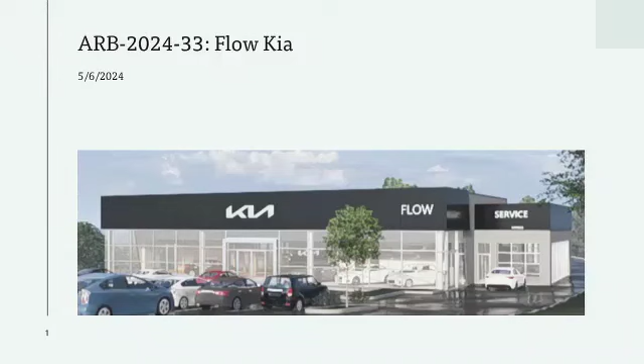Okay, today we are reviewing the proposed renovation for the Flow Kia building at Pantops. This is your second review of the architectural design, and it's a first review of the corresponding site changes. The site is located on the north side of Route 250 East, a short distance east of Town and Country Lane.

The existing building, as you probably remember, was constructed as a restaurant. It was associated with the Town and Country Motor Lodge, which was originally located just to the west. Those buildings were part of a group of buildings in the area of Route 250, built in the mid-50s in popular roadside architectural styles.

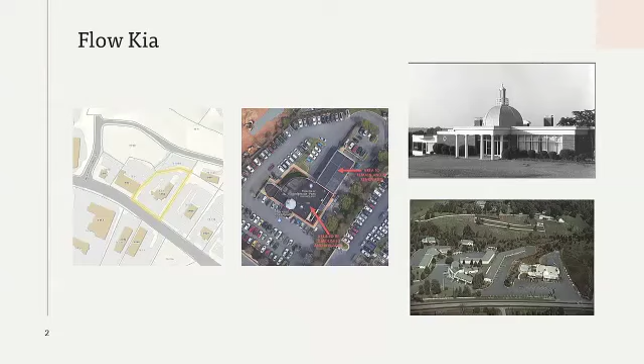In this proposal, the front portion of the building would be demolished and replaced with a new showroom building. The rear service portion of the building would be retained and renovated.

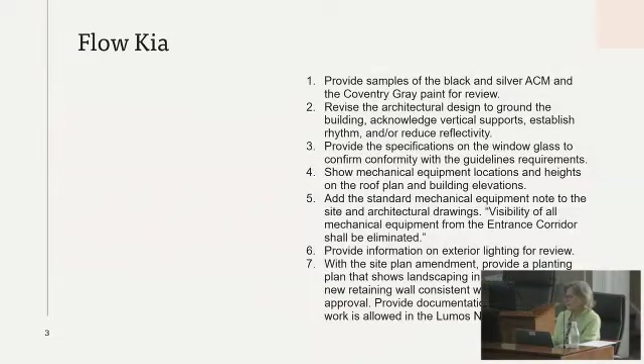You completed a review of the architectural design for this project on February 19th of this year. There were 7 comments resulting from that review that required revisions.

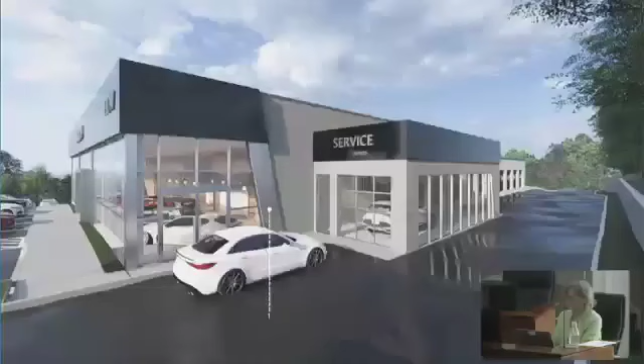The first comment was about providing physical samples of the materials to confirm primarily that reflectivity wasn't going to be excessive. Those samples were provided, and they're actually on the stage behind you if you want to look at them. The black panel there doesn't appear to be overly reflective, and the silver panel does, however, have a metallic finish. It's used for the angled elements in the building, the entrance surround, and columns on the front elevation. But given those locations and the amount that's proposed, we don't expect that metallic panel to have a negative impact on the street.

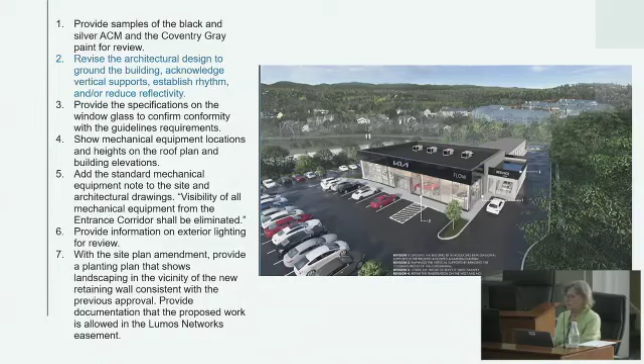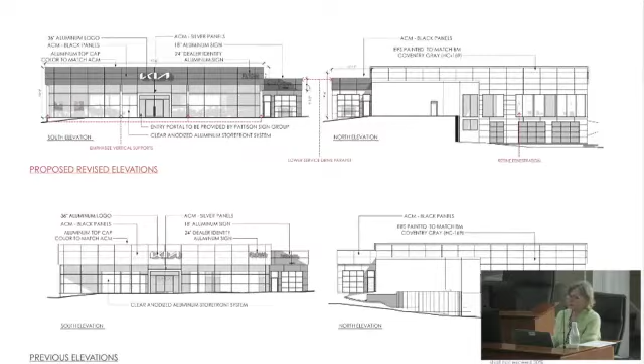The second comment from February was to ground the building and acknowledge the vertical supports. To do that, the angled elements were reorganized on both of the side elevations, and the front columns were moved to the outside of the curtain wall. We feel those changes do help ground the building and establish rhythm. The service bay was also reduced in height, and that helps with the scale and massing.

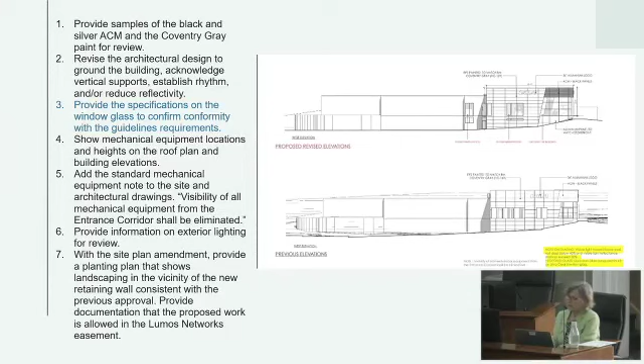The third comment asked for confirmation that the window glass conforms to the guidelines requirements. The note appears on the plan, and the manufacturer's website describes the glass as neutral in color.

There were 2 comments about mechanical equipment. A building section was included in the submittal that shows the equipment locations and heights level with the parapet. The equipment is also shown in the perspective images.

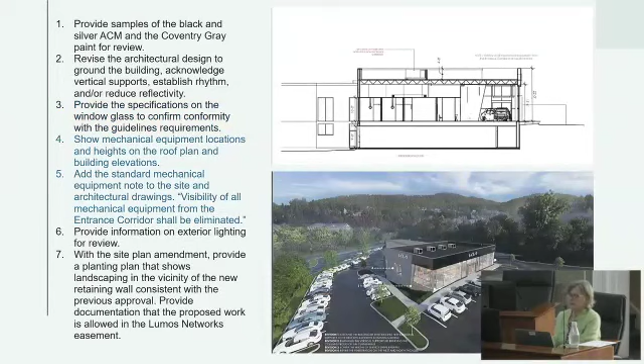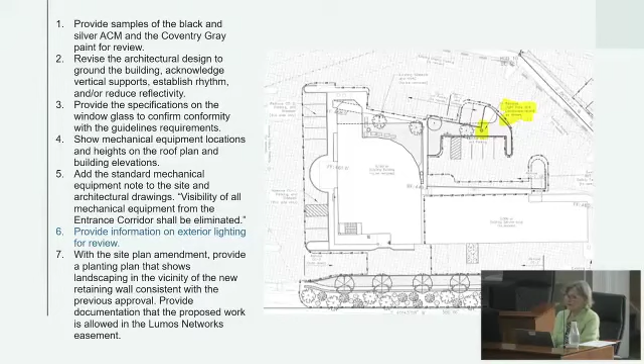Comments from February included a request for information on exterior lighting. There are no wall-mounted fixtures shown on the drawings, and the site plan shows 1 pole light to be removed. We've noted also that the current pole fixtures on site don't match what's on the previously approved site plan, so an updated photometric plan will be needed.

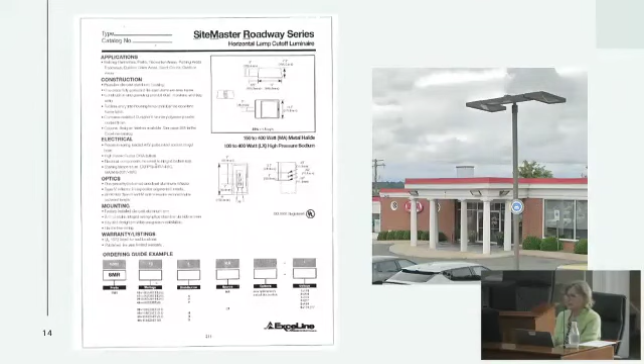Finally, in the previous review, we noted that a new retaining wall is proposed on the east side of the site. We noted that the site plan amendment would need to include a landscape plan addressing two issues: the existing landscaping that would be impacted by the new construction, and an easement in the area that would need some coordination.

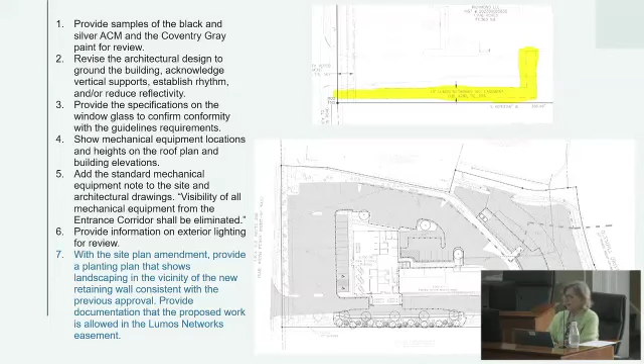A landscape plan was provided. It does include trees and shrubs along the retaining wall that are coordinated with the previously approved design. However, the easement was not addressed. That remains an outstanding issue.

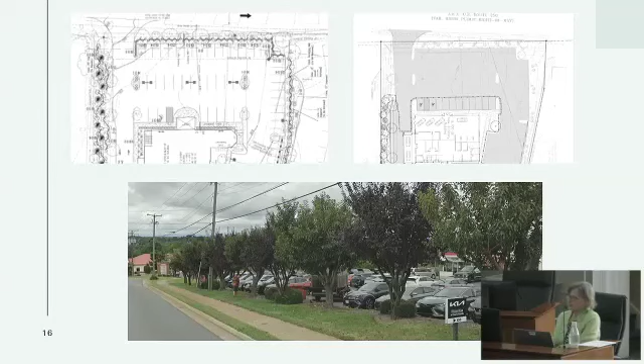The landscape plan shows significantly fewer shrubs at the parking lot perimeters than the previously approved plan, and it looks like some shrubs have been lost from the site over the years. So we've recommended that a consistent row of shrubs be shown on the plan, and we've added minor comments about tree species and notes on the plan as well. Our recommendation is for approval with the conditions listed in the staff report, and I'd be happy to answer any questions you have.

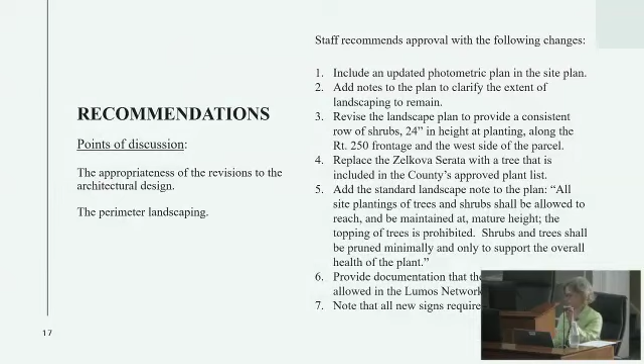All right, thanks a lot for that presentation. Tara, do you have any questions for staff? No, thank you for the presentation. Frank? No, I don't. Thank you, Margaret. I don't have any questions either, believe it or not.

So if the applicant has a presentation, now would be the time. Great, thank you.

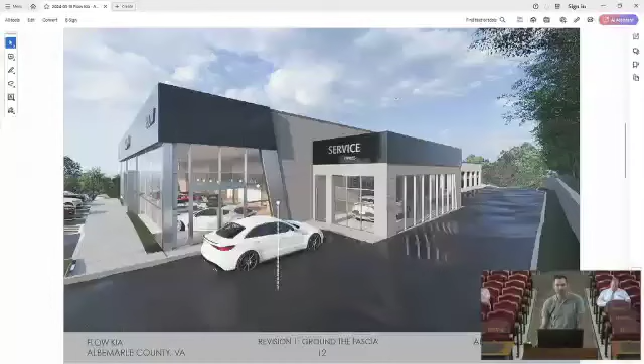My name is Kevin Schaefer. I'm with Design Develop. Thank you, Margaret, for that thorough presentation and the staff report and the guidance, that pretty much covered all the revisions to the architecture that I was going to run through. So I just wanted to let you know if there's any questions, we're here to answer them. I think Margaret did a great job going through the revisions, so I'm actually just going to turn it over to Justin at this point and let him talk through some of the site plan revisions and comments that have been ongoing.

Good afternoon, Justin Schimpf, the engineer for the project. I think most of our questions or comments are really clarifications we want from the staff. Some of the comments maybe not being included is a timing issue. We submitted this to the county earlier than before the ARB meeting you all had last time. So a few things didn't get addressed because they came up afterwards.

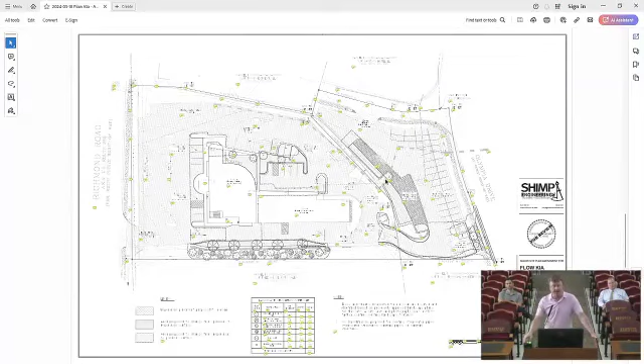Starting with a simple one, the Lumos easement just serves the building. It's fiber optic, but they no longer use that anymore, and we're having a hard time getting Lumos to respond. So it's not an easement for some other adjoining business, it's service to that building. That particular company requires an easement on your own property for their own hardware. So if that note could be revised to say 'if possible' or something, such that if we can never get anything, we're not worried about putting trees in there, because if we hit the line, it's only going to disturb our own service.

We'll of course have it marked and avoid it during construction, but that's what it is. So if we could get that clarified, just in case we can never get them to confirm anything about it. And then the other comments, I think, Margaret, if I understand correctly, is that the prior approved site plan essentially showed the standard rows of shrubs that have disappeared over time, and you all want to see those back per standard. So that's understandable, and I don't think we have any particular concern about those items.

The other change recommendation was to change the Zelkova to a different species, which makes sense. We are going to retain some in this picture right here. If you look, there'll be a couple Zelkovas in the very front here, and then a couple in the back that are part of this row, and then we'll replant with a different species in the middle. The retaining wall grading is taking out all of those trees in this area, and our proposal originally was to replant with the same species. We're just going to swap that one out since it's no longer on the county's approved list.

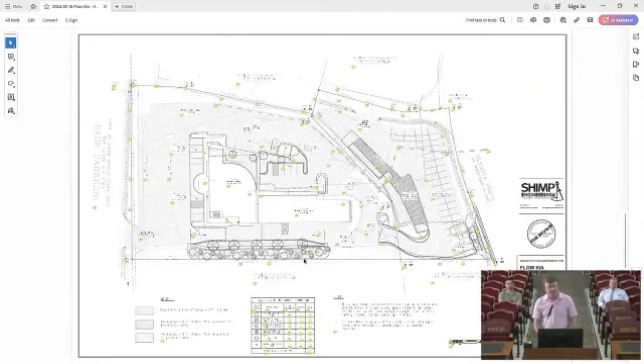So I think that's really the only concern we had about the recommendations. If we could just get a little leniency on the Lumos easement because of its unique circumstance, we should otherwise be able to address the comments. That's all I have.

All right, thanks a lot for that presentation. Frank, do you have any questions for the applicant? Sure. Justin, I guess the question for you: are the trees in the easement small trees? Are there any large canopy trees, or are they? The Lumos easement, yes, there are—I'd have to zoom in on this a bit.

So, proposed plants—we have the easement right here, this is one of the lines of it, then it goes to the edge of this retaining wall. So actually it looks like we just got hollies and service berries kind of back in the easement area, and the larger trees are actually in the front of it. Yeah, okay.

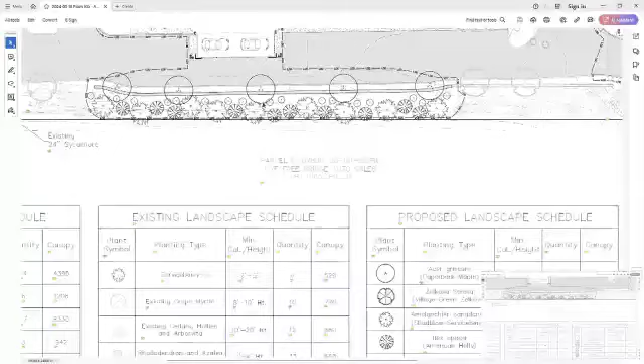Thank you. Okay, thanks. Tara, do you have any questions? No, thank you, Justin. All right, and I don't have any questions either. Thank you.

Are there any members of the public that would like to make a comment? I don't have anyone. All right, thanks a lot.

ARB will now go into discussion. I guess we'll start with Tara if you have any comments.

Just that I appreciate the design team's addressing the comments. I think that the renderings as presented show significant development. I think that a lot of our concerns and comments have been addressed, and yeah, I appreciate the work that's gone into it and the presentation. Thank you. All right, thanks. Frank? Yeah, I agree.

Great presentation. It's very helpful how you highlight the revisions and how you speak about it. I think just looking at that easement, might be a question for you, Margaret, is there something that the applicant can include in the plans as far as...

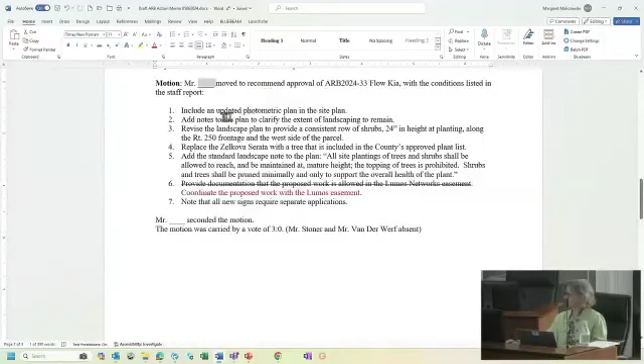Does anyone feel that it looks so good they want to make a motion on it? Yes, I'll move to recommend approval to ARB 2024-33 Flow Kia with the conditions listed in the staff report, including number 1, to include an updated photometric plan, 2, to add notes to the plan to clarify the extent of landscaping to remain, 3, to revise the landscape plan to provide a consistent row of shrubs, 4, to replace the Zelkova serrata with a tree that's included in the planting list.

Sorry, do I have to read all these? No, actually, I think because it's such a short meeting, we should. Just pad it out. Start over. You did. I do make that motion.

Right, and just for the record, noting the revision to number 6 to coordinate the proposed work with the Lumos easement. I'll second. All right, great.

We could call a vote on that. Mr. Henningsen, aye. Mr. Hancock, aye. Mr. Mitsino, aye. Thank you. All right, thanks a lot.

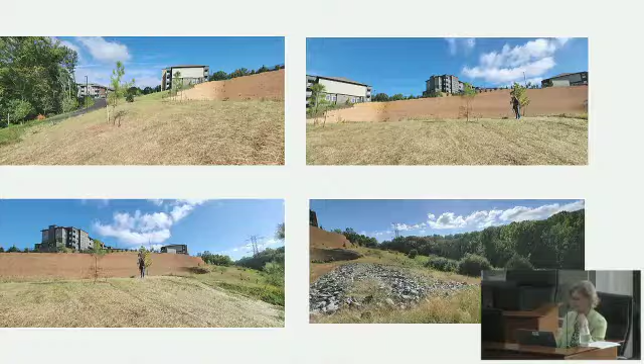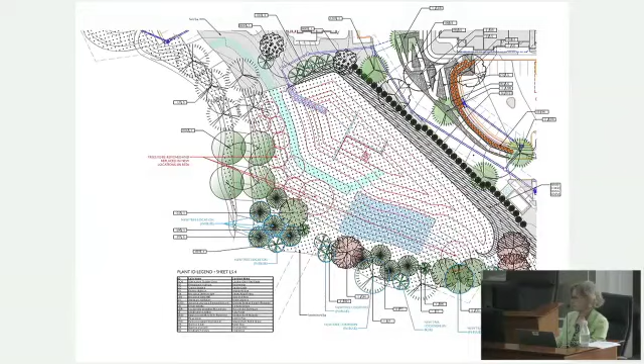What I want to report on today is about the landscaping at the stormwater facility near the retaining walls at the Alto View Apartments, previously called Presidio, which we discussed a few months back. We've learned that some of the trees planted around that facility should not have been approved in those locations because they are located on top of the dam. So we've coordinated with the various players, and we've asked for the trees that need to be removed to be moved and replanted in nearby locations. That's what we're looking at on this plan, let me get a little closer here.

The trees marked with red circles are the ones in locations that should not have been approved. Those trees would be moved to the locations marked by the blue circles, so they would all get moved to locations that are better for the facility and can be approved. So this is really just for information, there's not a whole lot of other options here, and we appreciate the applicants being willing to move them to acceptable locations.

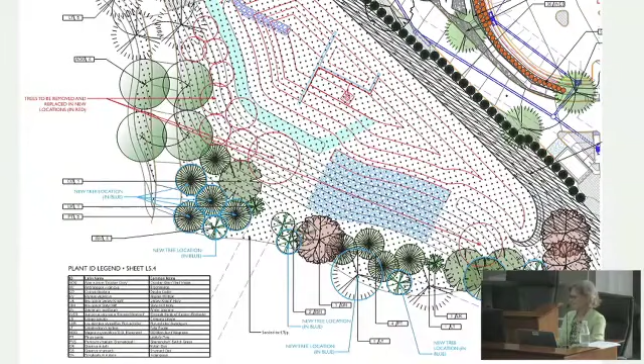Any questions? Can I just ask how it came up, how this issue was identified? I think it was one of the inspectors who was looking at the project and just was out there and realized they were not in places where they should be. So they were not planted in the incorrect location, they were drawn in the incorrect location. The locations you see in red are what was shown on the plan that was approved, and that should not have been approved there. They were planted where they were shown, but should never have been shown there.